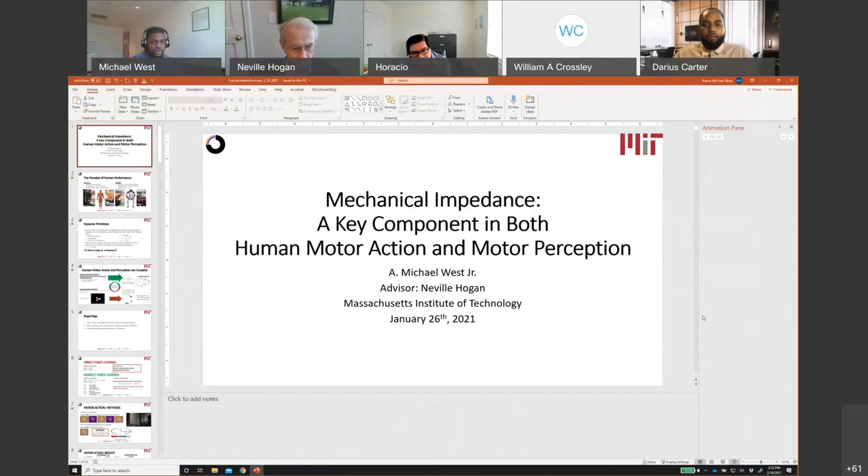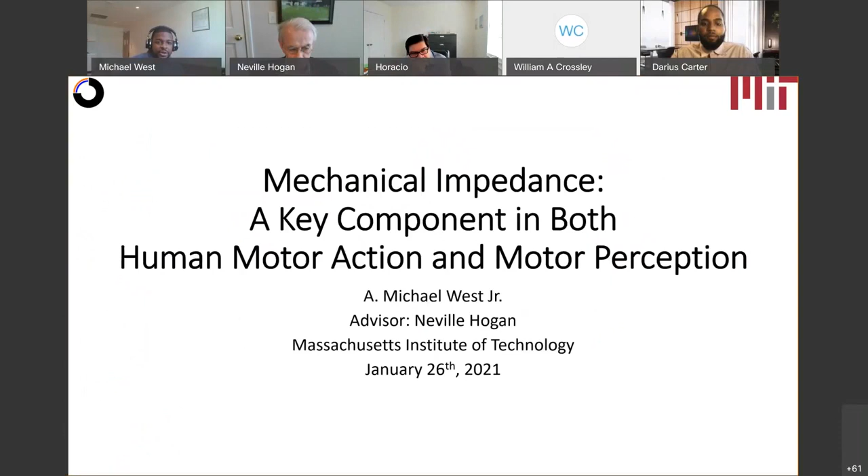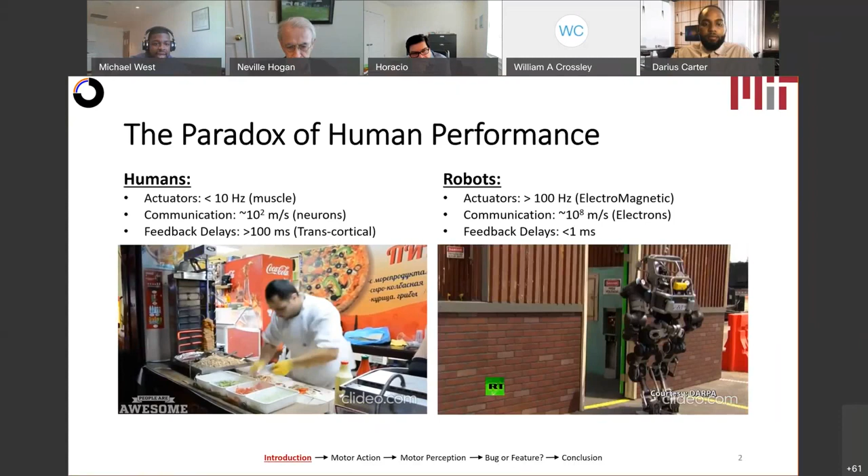All right, so as Professor Hogan said, today I'll be talking about mechanical impedance not only in the motor action domain, but also in the motor perception domain as well. So going right into it, in our lab, we study how humans manage physical interactions. Specifically, we want to understand from a control standpoint how humans control motion so that we can implement this on robots. In the video on the left, you can see humans successfully managing some of their everyday tasks, while on the right, you see some of the most advanced humanoid robots at the DARPA Robotics Challenge failing to do tasks that we humans find trivial. Just traversing through a door, trying to get out of a car, walking through sand.

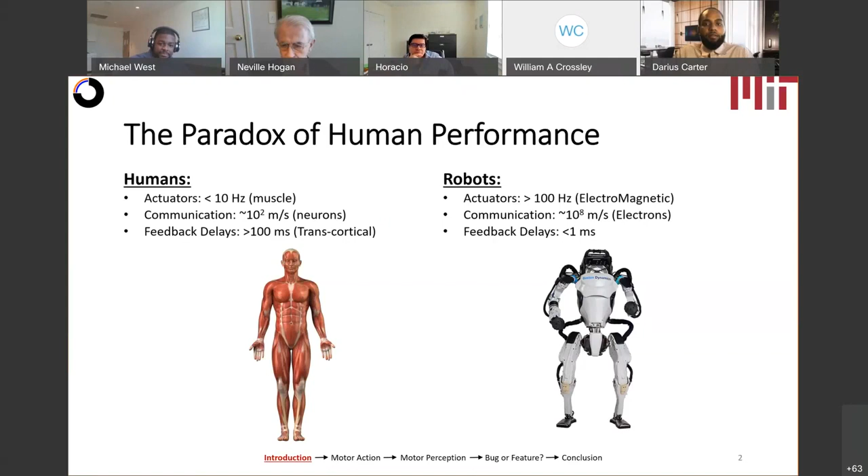And what makes this most interesting is when you look at the humans' wetware and hardware. For instance, humans' actuators are about an order of magnitude slower than robots. Our communication is about 6 orders of magnitude slower, and our feedback delays are about 2 orders of magnitude greater. So it appears that we are doing a lot more with less. So the question comes, what enables this paradox of human performance?

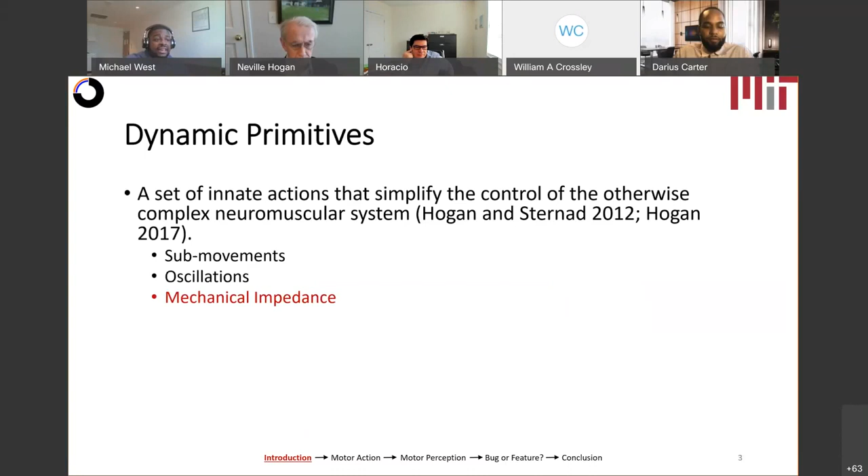And one solution is this idea of dynamic primitives, which are a set of innate actions that simplify the control of the otherwise complex neuromuscular system. The key aspect of these dynamic primitives is that they are presumed to be some semi-autonomous output of your neural control. What that essentially means is they trigger themselves and kind of play out on their own. Professor Hogan and Professor Sternad have identified 3 of importance. However, today I want to focus in on mechanical impedance as it has been specifically proposed for managing physical interaction.

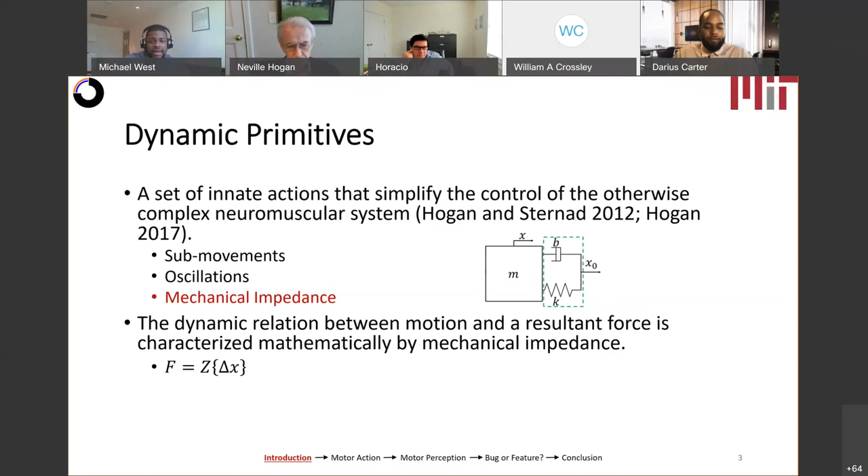Mechanical impedance is the dynamic relation between motion and a resultant force. Oftentimes it is modeled as a linear spring and a linear damper between some nominal trajectory and an actual motion. And lastly, I presented mechanical impedance in the previous slide as a feature that enabled humans to do great physical interaction tasks that robots could not. Today, I want to ask, does it have limitations? Can it serve as a bug as well?

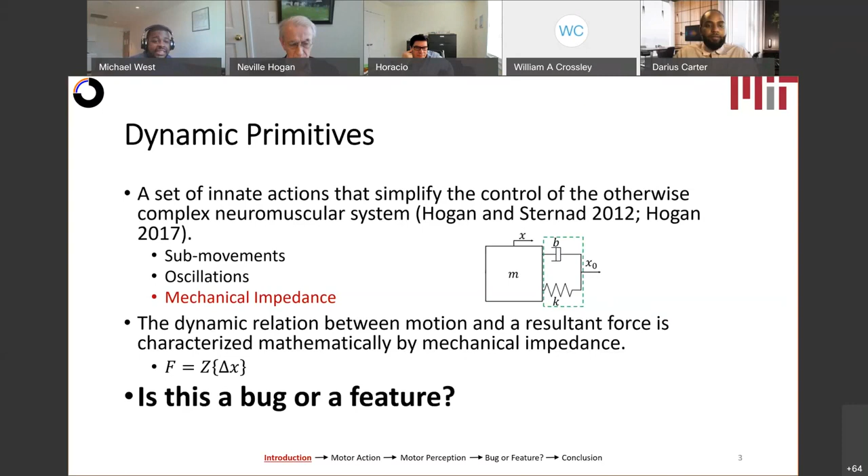So in neuromotor control, there's this idea that motor action and motor perception are coupled. What that means is when you act on something, you change your perception of it. And when you perceive something, it can change the way you control your motor action as well. I think the best way to internalize this is thinking about how babies learn. They came out of the womb not necessarily knowing how to walk or talk, but from observing the actions of others, they can create these new motor functions of being able to walk on their 2 feet.

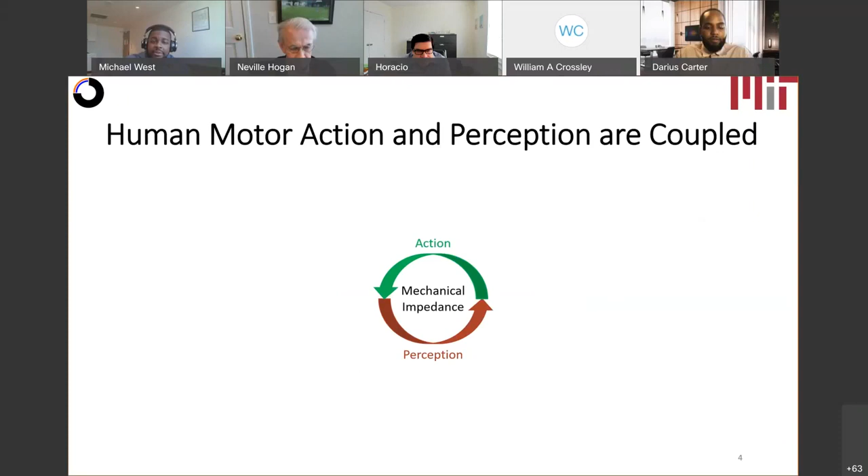And today I want to talk about how mechanical impedance is actually a part of this motor action, motor perception coupling. And I'm going to do that by presenting 2 experiments, one in the motor action domain and the other in the motor perception domain.

Looking more specifically in the motor action domain, a couple of current solutions to manage physical interaction include compliance and force control and hybrid control, which assumes that you can control both motion, you can control position and force independently, as long as they're operating in orthogonal directions. And this has led to some roboticists using direct force control measurements during motion to measure human intent.

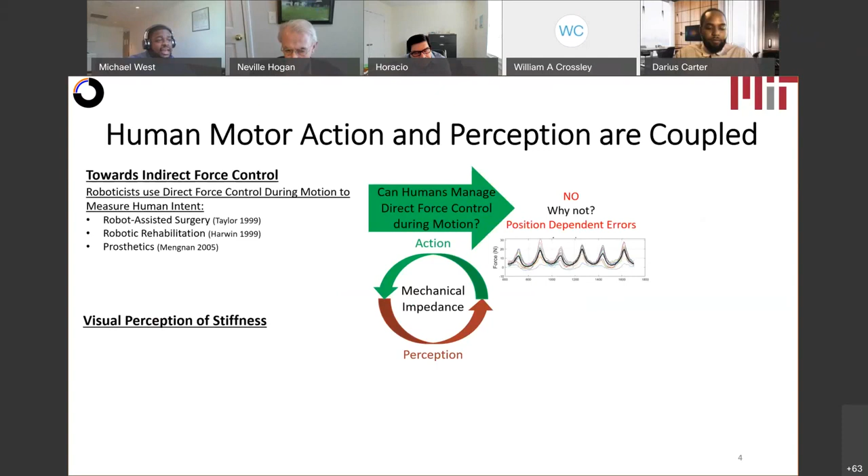Some examples are listed. However, I want to take a step back and ask the fundamental question: can humans actually manage direct force control during motion and independent of that motion? And what I'm going to show you today is no, they cannot. And the reason is because force is coupled to motion via an impedance term. And we're going to call that controller indirect force control.

After giving you an understanding of mechanical impedance's role in motor action, we're going to take a look at how it's played into motor perception. And as Professor Hogan mentioned, a previous colleague of ours, Professor Meghan Huber, previously asked the question, can humans perceive limb stiffness from visual observation of motion? What she did was had subjects sit in front of a computer screen, observe this 2-link manipulator move, and rate its stiffness on a scale from 1 to 7.

And she found that subjects could actually correlate their stiffness ratings with simulated joint stiffness, which is remarkable considering that stiffness, an aspect of mechanical impedance, is the relationship between force and motion. And just by looking at a computer screen, you inherently only have access to motion information. However, the question still remains how, which is where I came in.

And I hypothesized that from this motor action, motor perception coupling, the simulated motion that Professor Hogan showed her subjects must be congruent with the human's internal model of motion. And the question which I asked and answered, and will show you today, is: what motion cues do humans use when estimating stiffness?

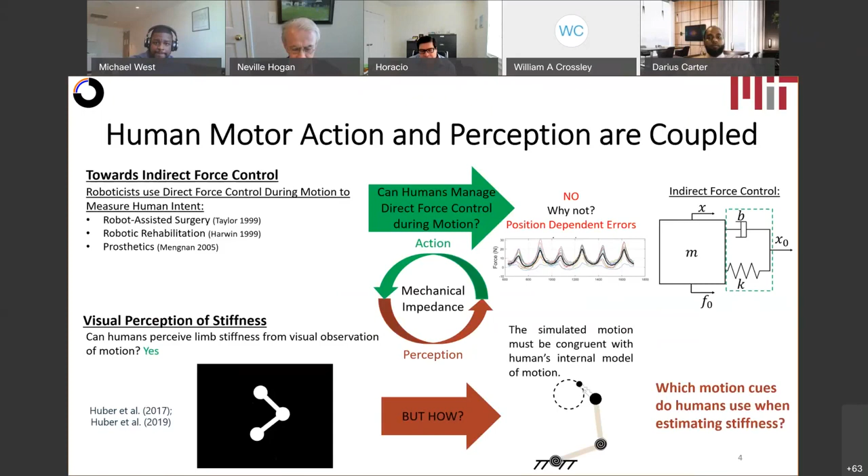So just to give a high-level overview of my presentation, I'm going to specifically ask and answer 3 questions. The first, in the motor action domain, can humans manage direct force control during motion? The second, in the motor perception domain, what motion cues are humans using to estimate stiffness? And lastly, is mechanical impedance a bug or a feature?

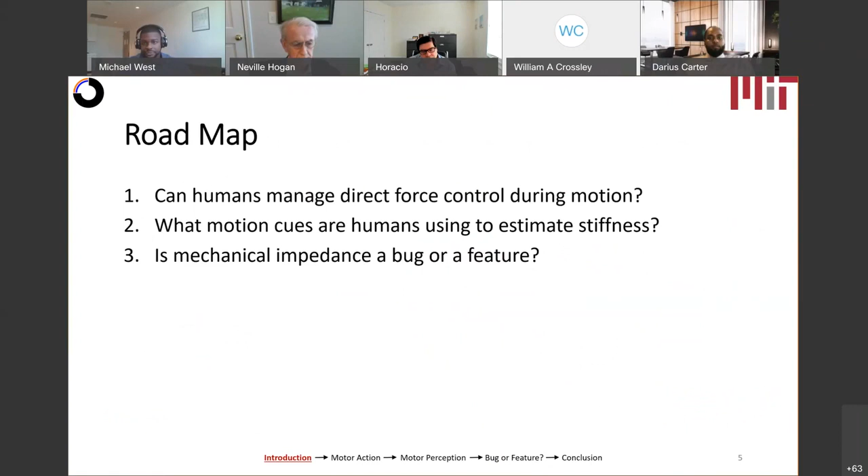So taking a dive into the first experiment in the motor action domain, I specifically aim to test the idea that humans do direct force control. And what I mean by that is humans may have some sort of commanded input force that directly goes to the output force. Now, there may be a set of forward-path dynamics or noise that I have not included in the equations here, or those can be corrected via feedback.

The key hypothesis, though, is if people are doing direct force control, errors in their contact force will be independent of motion. And if this hypothesis turns out to be false, then that leads us to this indirect force control, where the key component is this position-dependent impedance term.

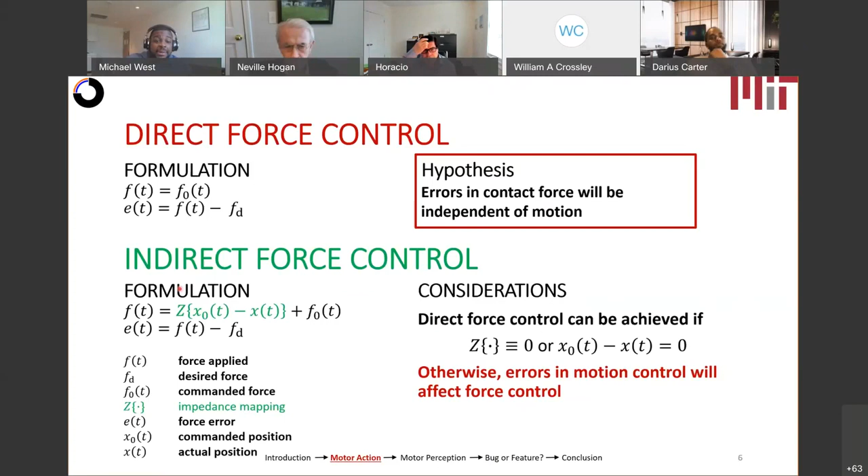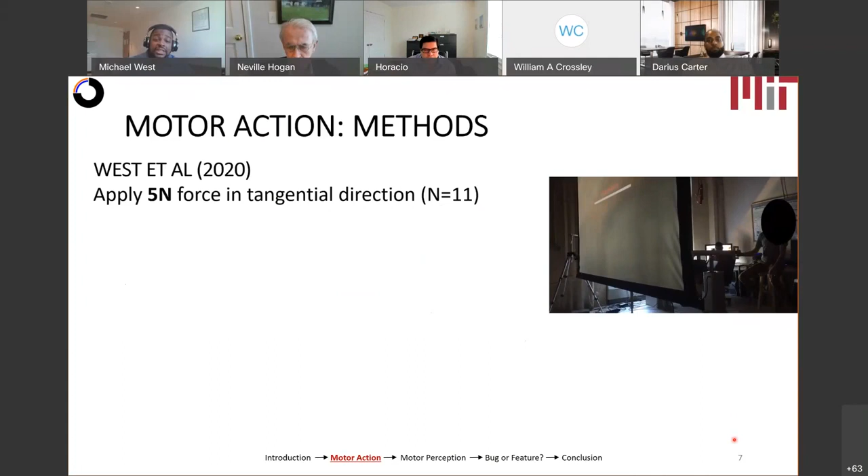So what did we do? We specifically asked subjects to apply a 5-Newton force in the tangential direction of the robot manipulandum as it moved in an elliptical path. That's shown here, and it's important to emphasize that this robot handle is providing its own motion. The human is just trying to apply a constant force on it. In a given trial, the robot manipulandum went around the ellipse 4 times. Furthermore, the experiment was split into 5 blocks, each consisting of 15 trials.

And in those blocks, they alternated between not giving visual feedback and giving visual feedback. That visual feedback was shown here, where subjects had the static white bar with their target force of 5 newtons, and the moving red bar was their actual force. But the key takeaway here is that given the 15 trials of 5 blocks and the 4 trajectories around the ellipse for a given trial, subjects traversed this ellipse 300 times by the end of their experiment, which will become important later on.

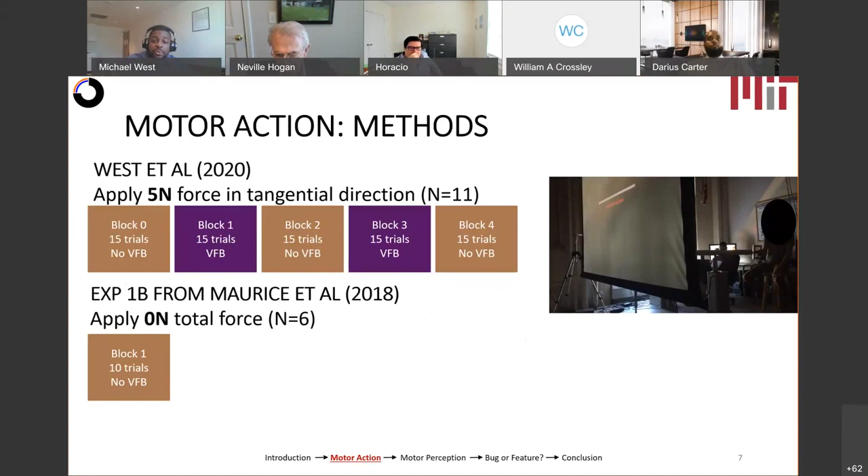Additionally, we were able to obtain data from another colleague, Pauline Maurice, who ran a similar experiment, and part of her experimental conditions were exactly the same as ours, except she asked subjects to apply a 0-Newton tangential force in 1 block consisting of 10 trials with no visual feedback. More importantly, though, the key component of Maurice's experiment simply asked, what velocity profile should the robot manipulator follow to best enable human interaction? She quantified this with the ability to apply 0 newtons of total force.

And her study concluded that the velocity profile should follow this 2/3 power law relation, which is essentially mathematically saying that tangential velocity is related to curvature raised to the -1/3 power. But rather than think about this mathematically, the best way to internalize this phenomenon is that you're moving faster around the straight edges and slower around the curves. And this velocity profile has been found throughout the literature to be consistent with a lot of upper limb reaching.

So as Maurice et al. found that this velocity profile best enabled interaction in her study, we incorporated it in our study as well.

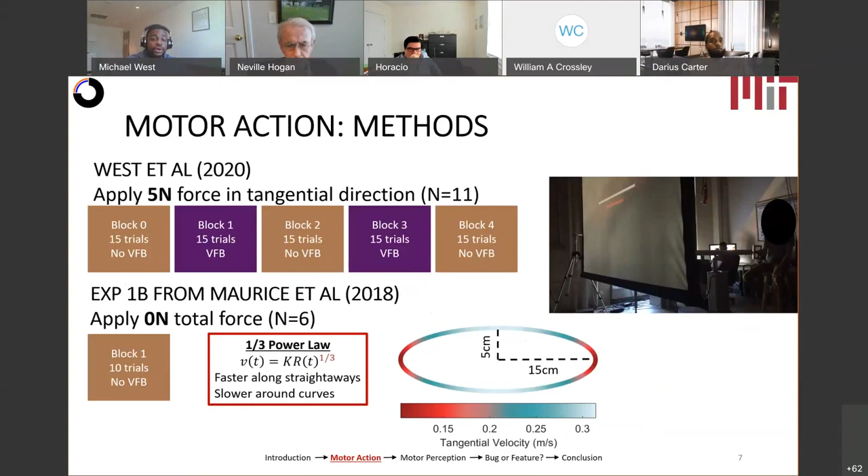So taking a look at the results of the study, what I'm showing you here is the root mean square force error from the target force of 5 Newtons in the 5 Newton experiment and 0 Newtons in Maurice's 0 Newton experiment. And this is separated by block as a function of trial. The blocks in purple are the blocks where subjects were given the visual feedback that you saw on the previous slide, denoted by the V here.

So you can see the means across subjects by the yellow dots, plus or minus 1 standard deviation by the shaded region. And then this red line is a linear fit to the data. What's important here is we calculated the correlation coefficient using this linear model, and we ran a statistical test to determine if that correlation coefficient was statistically different from a null result of 0, specifically looking to see if it was statistically negative.

And what we found is it's only negative in the first block, which says that learning only occurred in the first block, which, if we take a step back, makes perfect sense. Subjects in the 0th block were given an opportunity to become familiar with the robot manipulator and how it moved. In this next block, they're given visual feedback, and from the visual feedback, now they can reduce their error.

However, the second takeaway is that despite extensive practice, remind you, at this point subjects have traversed the exact same ellipse 300 times, subjects cannot reduce their force error to 0. So the question comes, why can't subjects reduce their error to 0? And the answer to this is periodicity.

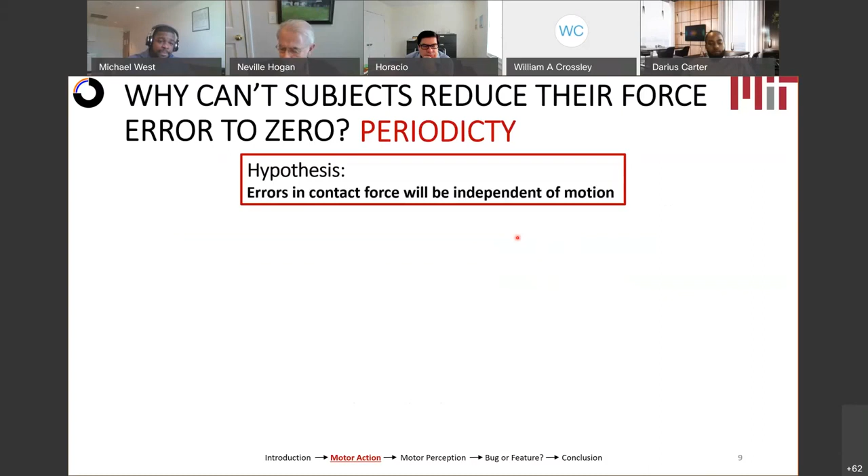Now, recall the hypothesis from the direct force control formulation. If subjects are doing direct force control, errors in contact force will be independent of motion. And what does that look like? If we took their force as a function of position, as a function of phase, and we took the autocorrelation of that signal, what we would see if this hypothesis was true is something that looks like this flat spectral density here.

However, if this hypothesis turns out to be false and there is some sort of periodicity, we'd see this attenuating sinusoidal signal. And in fact, that is exactly what we do see. Here is a representative subject in the 0th block and the last block, and we see their force plotted as a function of position, and the signal is very periodic. When we run the autocorrelation, we see peaks around 180 and 360 degrees. So the key takeaway here is that force errors are not independent of motion.

In fact, this result is quite robust across both experiments and across subjects. Here we show histograms of the largest peak in the autocorrelation function and its max peak lag. We see this cluster is centered around 180 and 360 degrees. More importantly, the max peak lag occurs at 0.45 and 0.41, and these clusters are statistically different from the null result of 0, suggesting that this is not just a random artifact, rather this is significant. So the key takeaway is that force errors are position dependent.

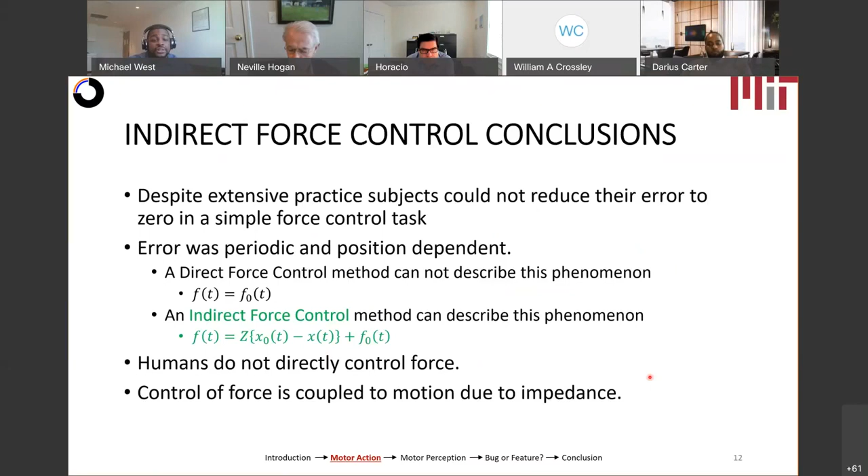So now with the understanding of mechanical impedance in the motor action domain, we can draw upon that motor action, motor perception coupling and ask, can we perceive an aspect of mechanical impedance? What we specifically chose to look at was stiffness, the relationship between force and displacement.

What Professor Hogan previously did was have subjects sit in front of a computer screen, observe a simulated manipulator move, and rate stiffness on a scale from 1 to 7. Subjects watched 30 simulations with 6 different joint stiffness conditions and rated their stiffness. And as we said previously, they're able to positively correlate their stiffness ratings with the simulated stiffness, which is remarkable. They're solving this F equals KX equation with just X. You're finding K with just X.

And the question remains, right? To answer this question, we should take a look into the underlying controller that was used to produce the simulated motions. The two-link manipulator was modeled as an arm moving in the vertical plane, subject to gravity. It had the typical arm dynamics, but the control law is shown here. It may seem somewhat complex, but if we really break it down, it's quite simple.

In fact, we have 2 impedances acting as separate attractors. One attractor is pulling the end-point of the hand about this circular trajectory. The second attractor is this joint space attractor, which is pulling the shoulder and elbow joint, if you will, to a nominal position. What's important here is that what was modulated in this experiment is this KQ term, this joint space attractor. When asking subjects to do this task without directly telling them, we were trying to see: can they tease out differences in this KQ term?

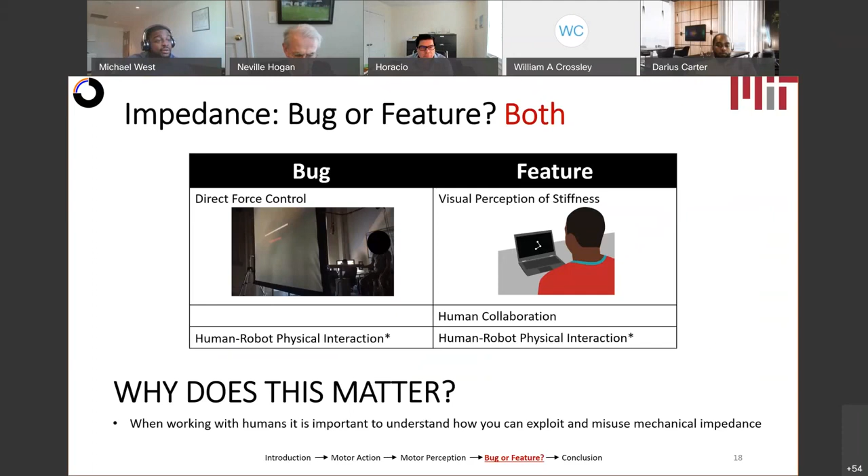So in conclusion, I've shown that mechanical impedance is a part of the motor action, motor perception coupling by, one, showing that it is necessary when modeling physical interaction by showing that humans can't do direct force control because motion is inherently coupled to force. And secondly, I've shown that humans can perceive an aspect of mechanical impedance, specifically stiffness, and their perception of this is robust to non-veridical velocity profiles.

And then the biggest takeaway is that mechanical impedance can serve as both a bug and a feature. It's up to the designer to choose to be cognizant of this and to exploit it rather than misuse it.

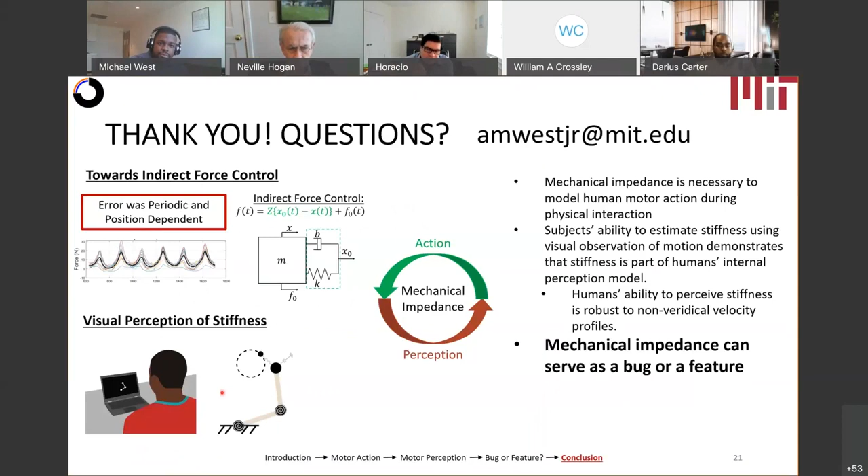I have a question. So Michael, first I want to say great talk. I really enjoyed listening to you. And so my first question would be, I think for your first experiment, you showed that you still had this non-zero force error as you were controlling for your experiment. And so I'm wondering, do you think this non-zero force error could potentially be back calculated to determine the bounds of human control of impedance?

So maybe potentially thought of in another way, right? There's the minimum force error that you see from your first experiment. Do you think that could be back calculated to say, well, humans can only control, let's say, their stiffness within plus or minus 5%, or their damping within plus or minus 5%, something like that? Curious to get your thoughts on that. Let me think.

It's tough. So I think, this screen is what you're viewing. So inherently, if we're assuming this indirect force control method, what's coupling the position to force is this nominal trajectory, which we often coin the zero force trajectory. And that's ideally somewhere along the forward path, the motion that's being controlled. Mm-hmm. And if we were to go ahead and basically say, can we solve this equation for Z?

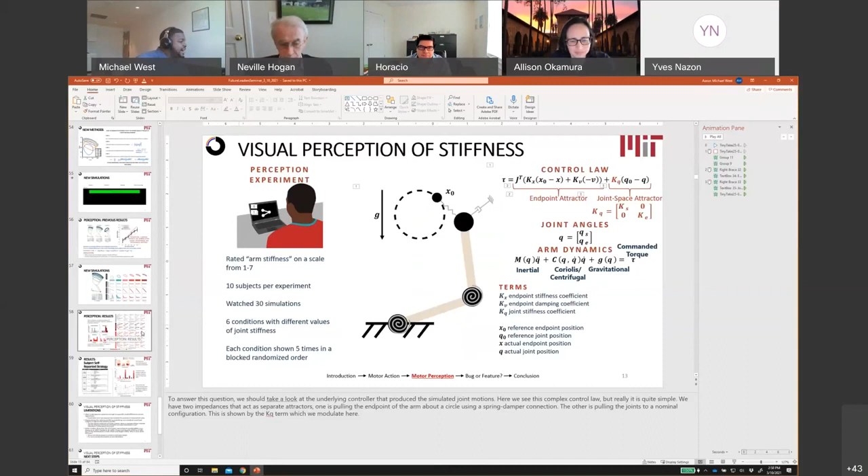And we didn't quantify whether or not subjects specifically said they thought about it as an arm and how that related. But most of what we did quantify is whether or not subjects are looking at past information, temporal information, joint motion, or endpoint motion. And our results in this realm were fairly inconclusive, in that regardless of what subjects said they were looking at, it didn't necessarily reflect on how well they performed based on our performance metrics. So to answer your question more succinctly, it's hard to tease out. But my key hypothesis is, yes, subjects are using what they know about their own motor controller. Thanks. Great.